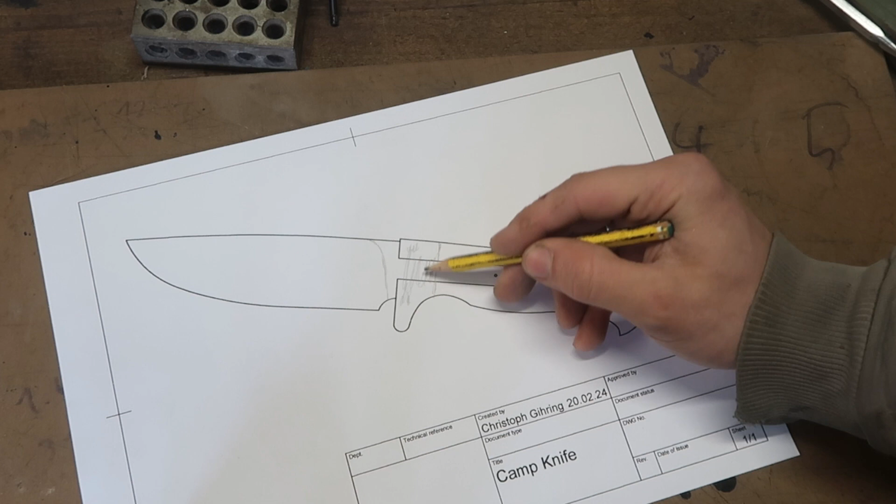Hey guys, we're back in the workshop and today I've got a pretty cool project for you because we are building a hidden tang knife, which I've never built before. Here's the drawing of the knife, you can see the hidden tang, and this portion up here should be brass, and I'll probably use wood for the back end. The blade is made out of 80CRV2, with a nice full flat grind. I'm probably going to do a convex grind on it, which will be a challenge since I've never made a knife like that.

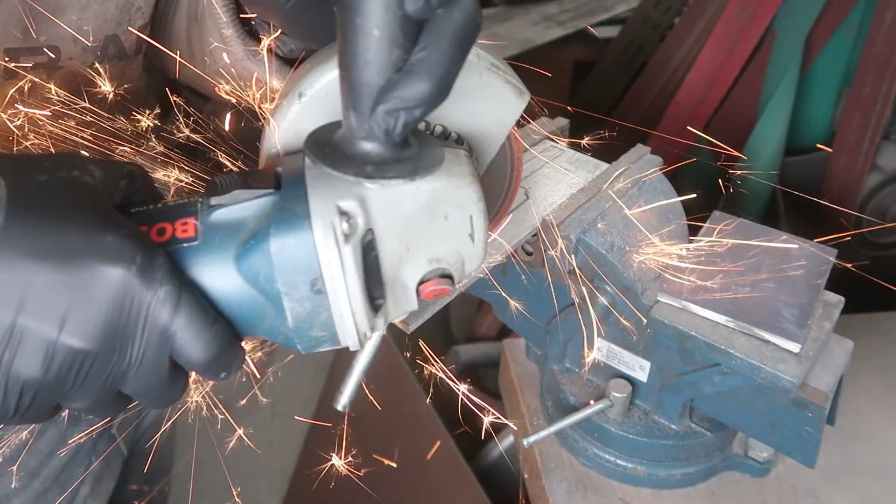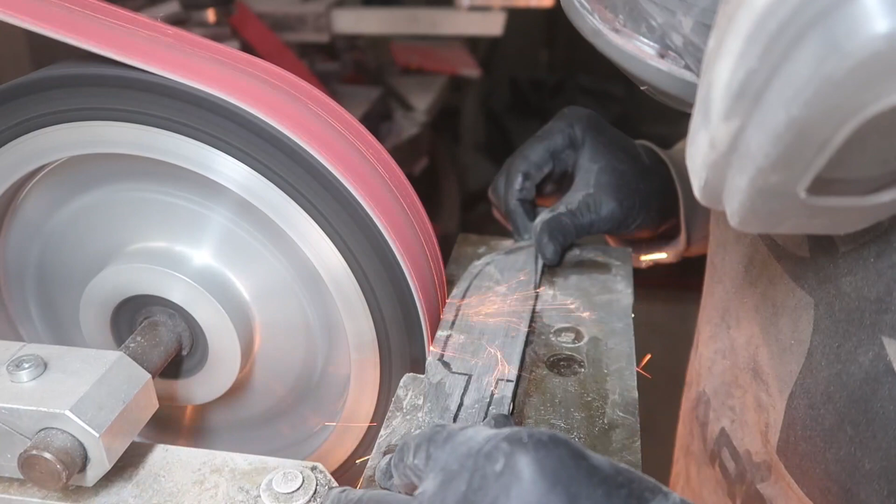Profiling my knives, I'm mostly using my contact wheel that just removes the material as quickly as possible, and you don't get any kind of low spots like you would on a flat platen. It's just super satisfying to watch how the contact wheel removes that material.

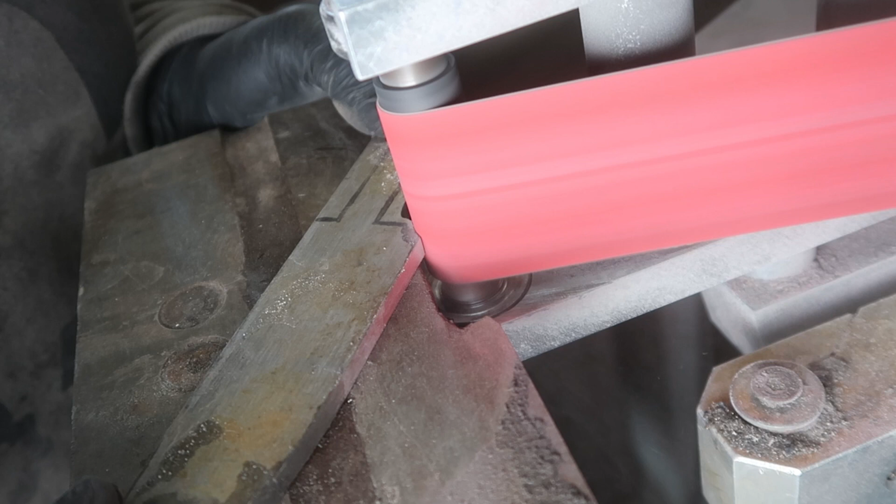So I have now roughly profiled the knife, and as you can see I haven't worked on the tang because I want to do that after heat treatment so everything is nice and square, and because I'm also waiting on a part for grinding that tang, which should come today, then I can grind it tomorrow after heat treatment. But that's the blade shape, and I will now start rough grinding before heat treatment because I also want to add a hamon to this blade.

So here I'm testing out a new Dykem pen, and this pen is more resistant to high heat, which I really do love.

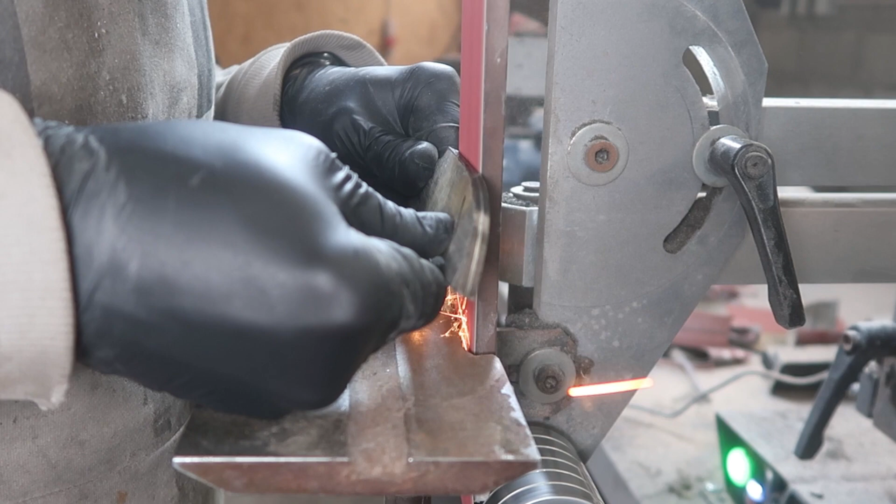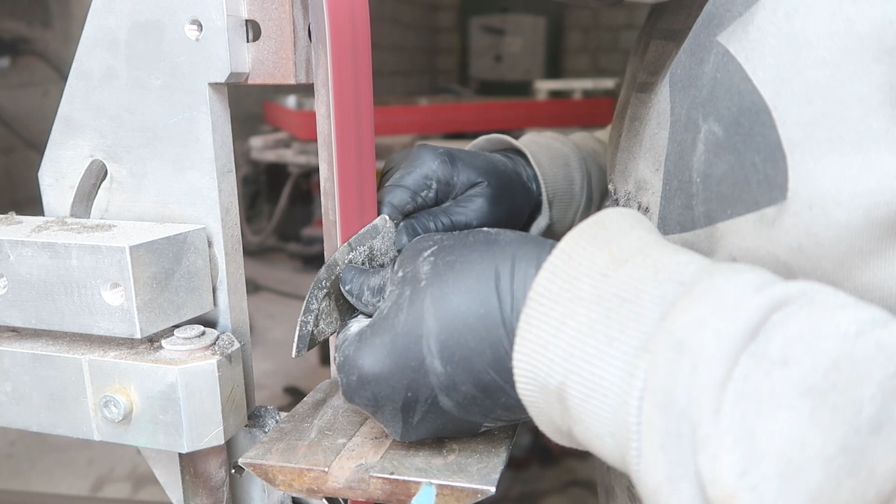Now for the first step on the bevel grinding, I take the knife to a 45 degree angle and remove bulk of the material with an older belt, then I switch to a fresh belt. When you knock out that 45 degrees first, your belt stays much nicer because it doesn't have a sharp corner to remove at the beginning of the grinding.

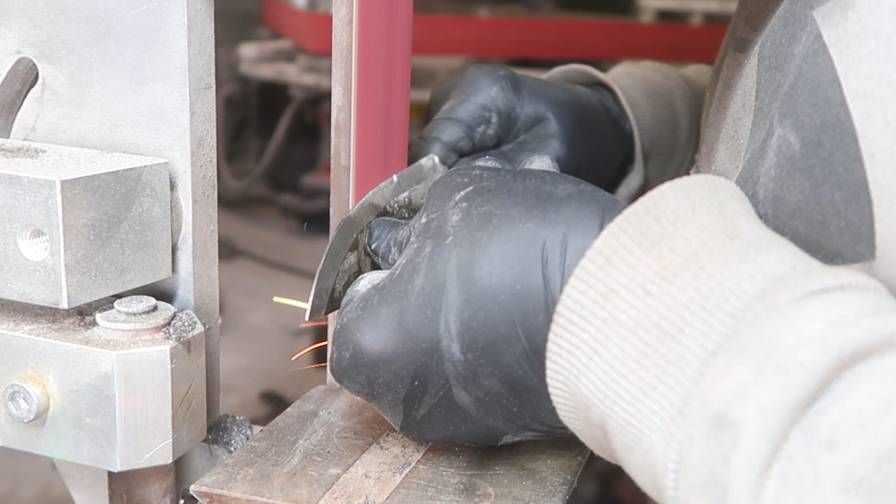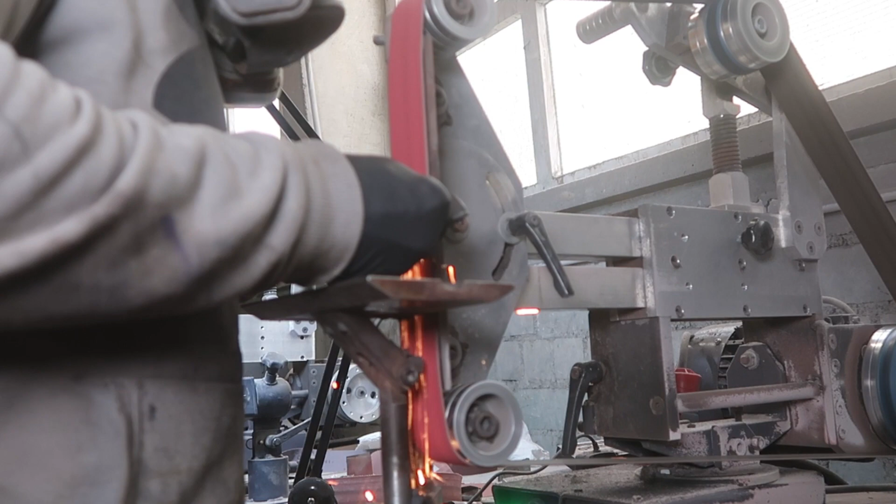The times you see me grinding, I'm wearing those black latex gloves, and I know you shouldn't wear gloves on the machine, but I have so many small metal splinters in my fingers and I'm sick of it. I think I have so many in my skin that I get detected at the airport.

That camera lens is... it's pretty dirty.

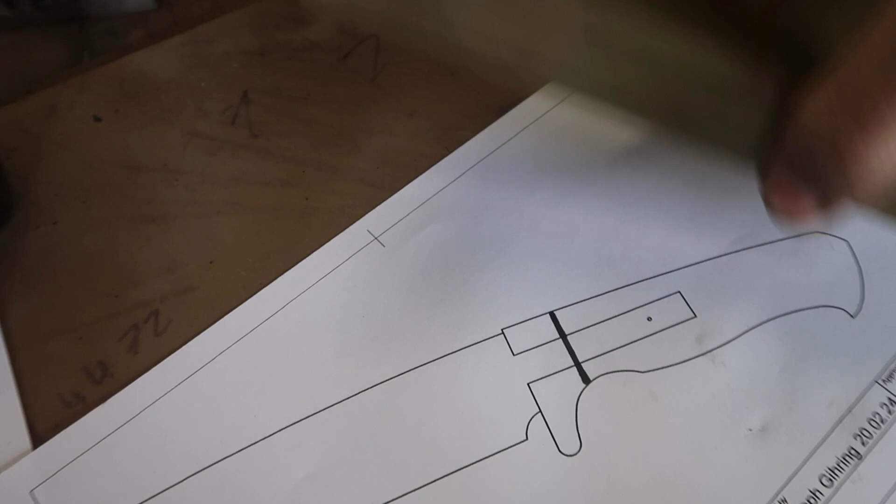Better now. So you can see it here, this should be the brass bolster. And I've got this thick, yes that's thick with three C's - this is like a really thick piece of brass, so I've got to cut out this piece.

And I also want to use that oak, it's called Mooreiche in German I think. Don't know, it's really beautiful black wood, and I just want to prepare everything so I can start working on that tomorrow.

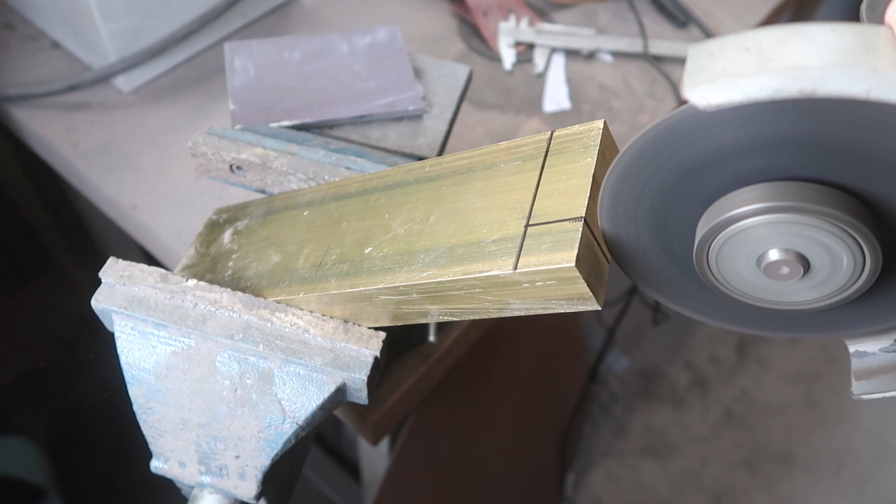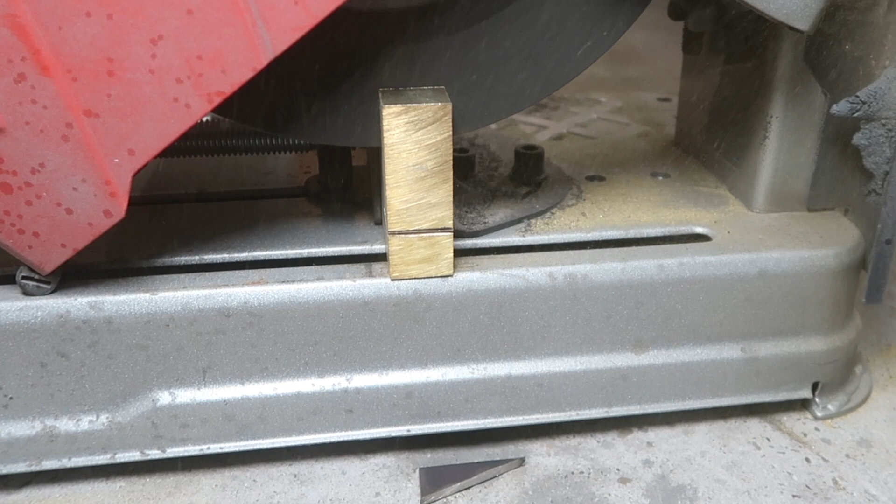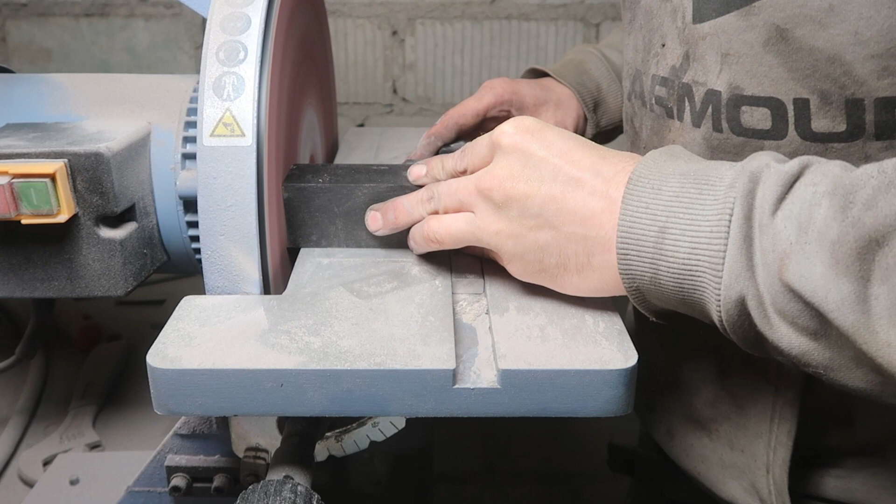Working with a hidden tang is really tricky because you have to get everything nice and square. Everything has to line up - the bolster has to line up with the wood, the tang has to line up with the bolster, and that was a really challenging part to get everything nice and square.

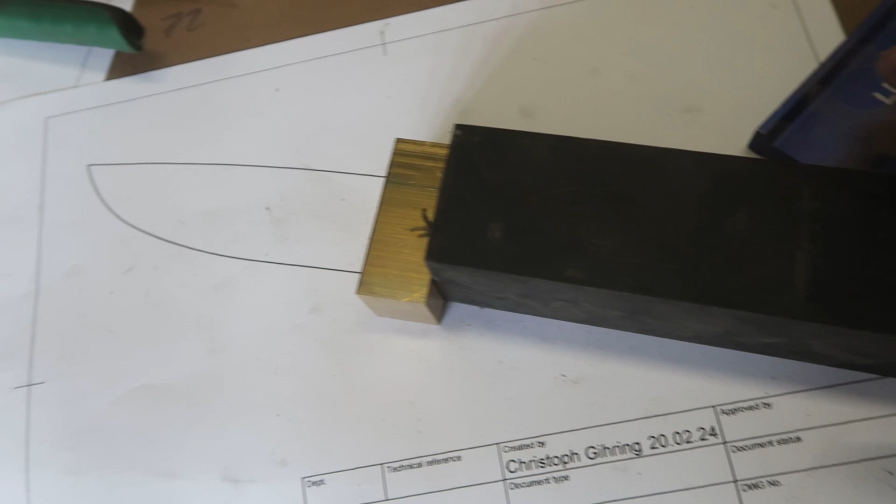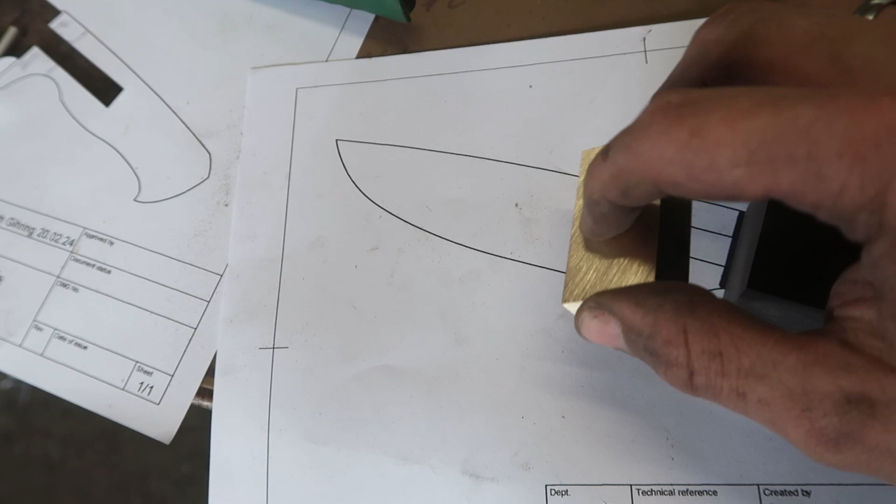So now you can roughly see my setup on how I want to have it here. The guard will be this brass piece, and I've got this black oak right here, just set up roughly like that, and then the blade will come out of here. So that will be challenging to get everything nice and fitted up.

So now that the knife is out of the heat treatment, I can finish up the grind on this knife. While I'm grinding, I'm always checking my grind lines, but because we did a hamon on this knife, I'm also always checking in the light if I can already spot the hamon, and it looks already really cool and amazing.

What is a hamon? A hamon is actually a differential hardening on the blade, so the edge is hard but the spine is soft, and later when you etch it, it will show up as a nice, really cool line in the blade.

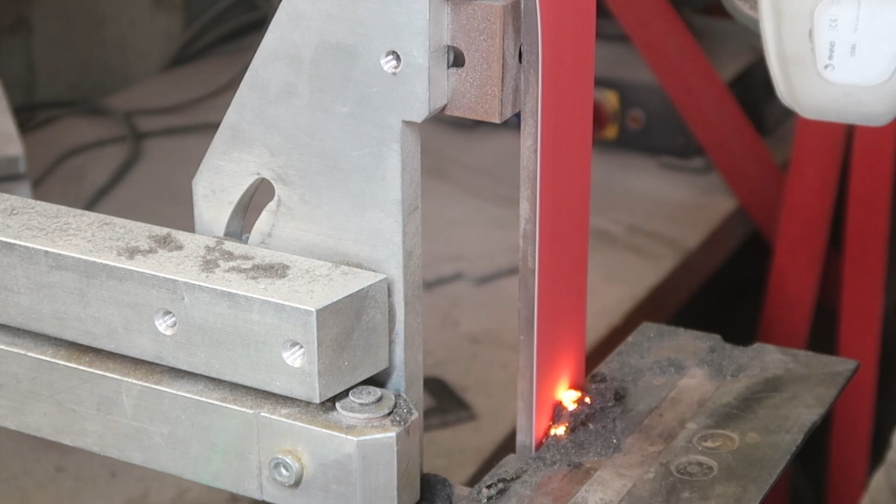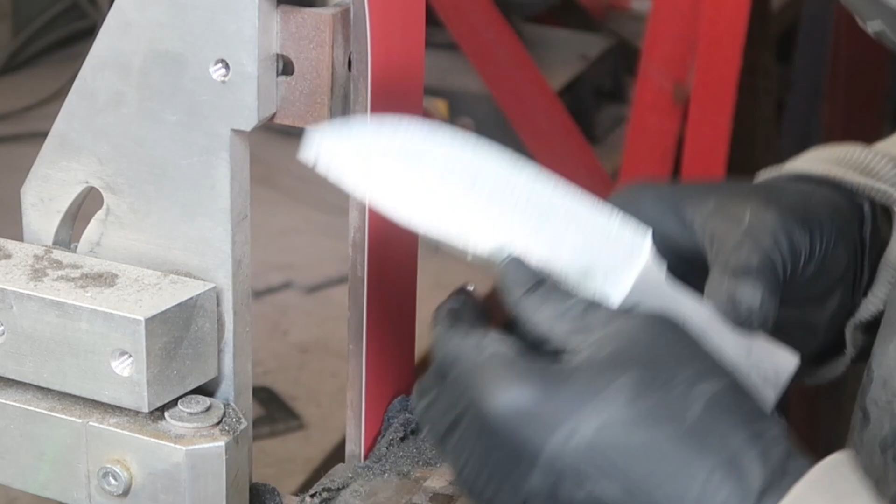So it's now the second day and the package arrived yesterday, luckily from Handlematerials.at. Great guy, love him, and he shipped it out quite quickly. I ordered some material and some other tools that I need for this project.

So what I actually got in here is some material and maybe some small teaser, but that will be for another project. This is a straightening hammer with a carbide end bit, so you can straighten out things, but that's also not for this project. I think it's this one right here.

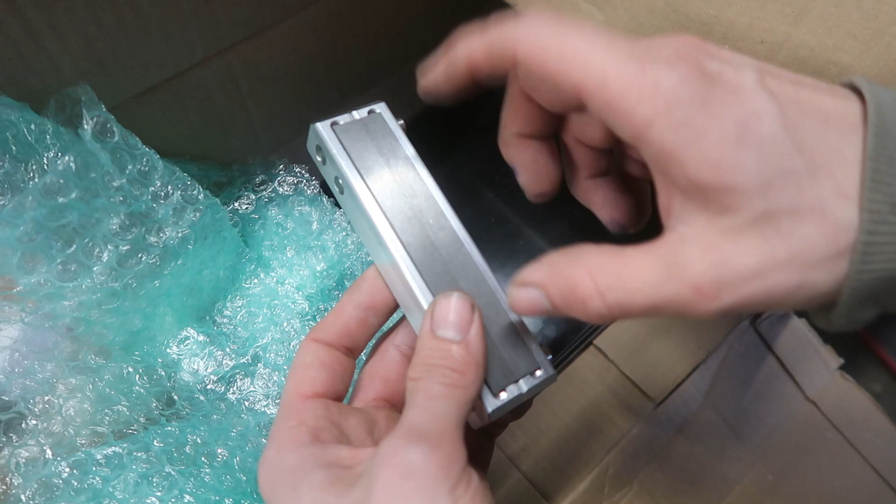So let's just have a look. Yes, that is a file guide with carbide end faces right here, so you can grind really closely to the grinder, and those carbide end pieces are super hard. I think you can just cut them with diamonds, and if you touch them on your belt grinder, nothing really happens and everything stays nice, square and symmetrical. So these are pretty neat.

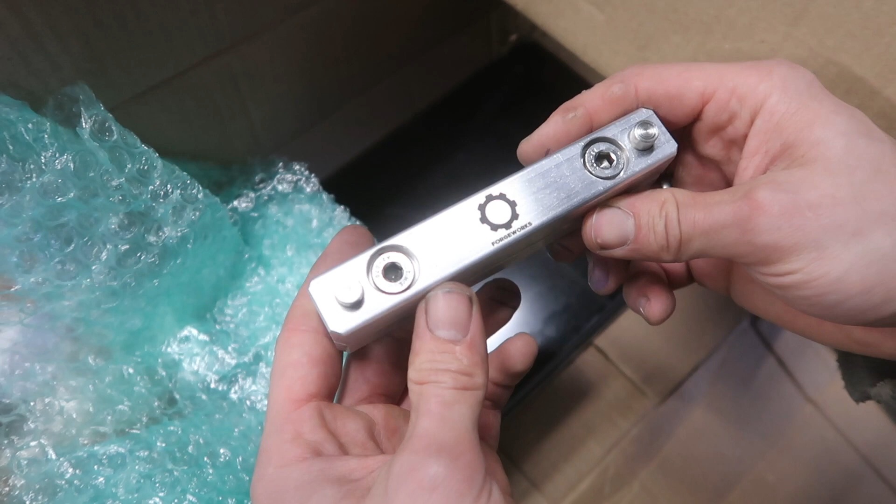And what a Chad, great guy, love him. He also etched my logo on there, which I didn't know, but now I know, and what a great Chad, really love him. So yeah, that's pretty cool.

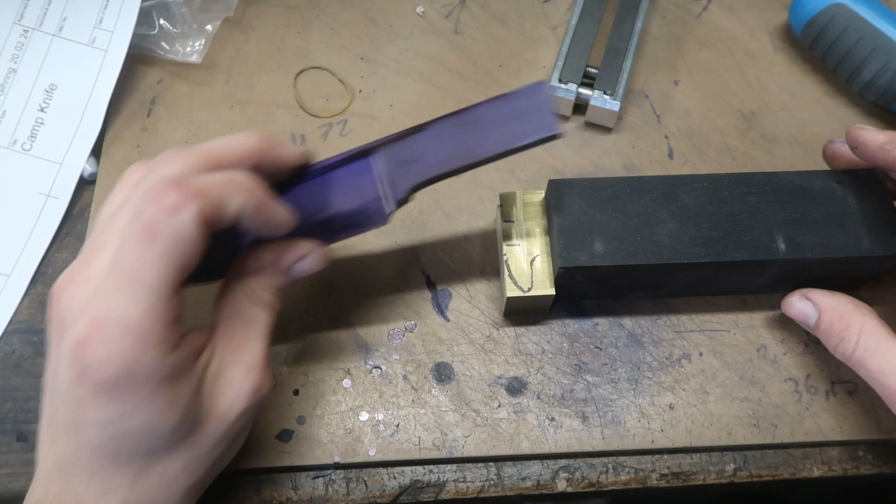So let's stop talking and start working on the knife. All right, so what the next task will be is we have to scribe out some lines for this tang, because as you can see here, the knife needs a tang, and this one is much too thick right now. And I've also prepared these ones yesterday, and this should fit somehow in there like that. So we have to scribe some lines and then also use the file guide to get everything nice and square.

So now I'm ready to grind in those shoulders with the file guide, and the file guide also helps me so I don't grind in too deep, so I have a definite stop on that and I can get everything nice and square. So I've squared it up with the spine and drawn some lines onto it. So let's start grinding.

So now I'm done with grinding in the shoulders of the blade and finishing up the tang of the knife. I've also ground a little bit on this side here, so later on the fit up will be nicer.

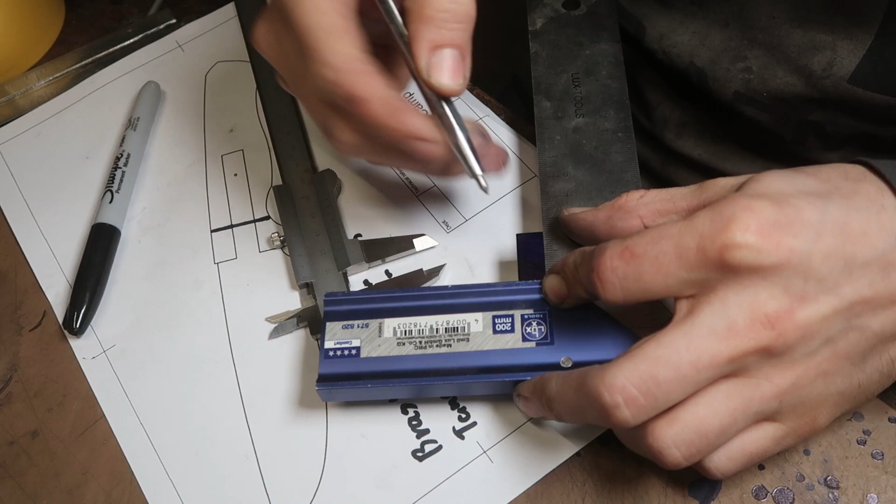Fitting up the guard was also challenging because you have to take a lot of measurements, especially when you haven't done it before. That was really tricky to see which measurements I need, where to put them, how to measure everything, is that correct? So there were a lot of things in my head at the moment, like what should I measure, what should I do? It was a lot of thinking, and I hope this gets better in the next project.

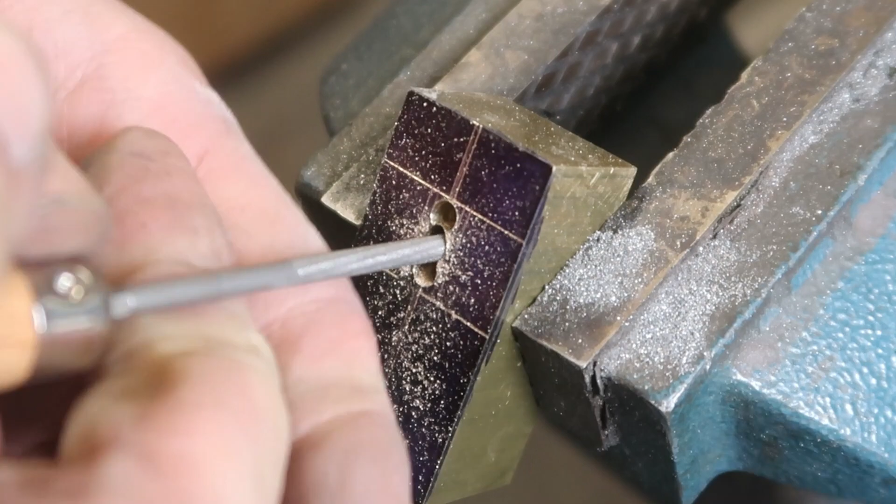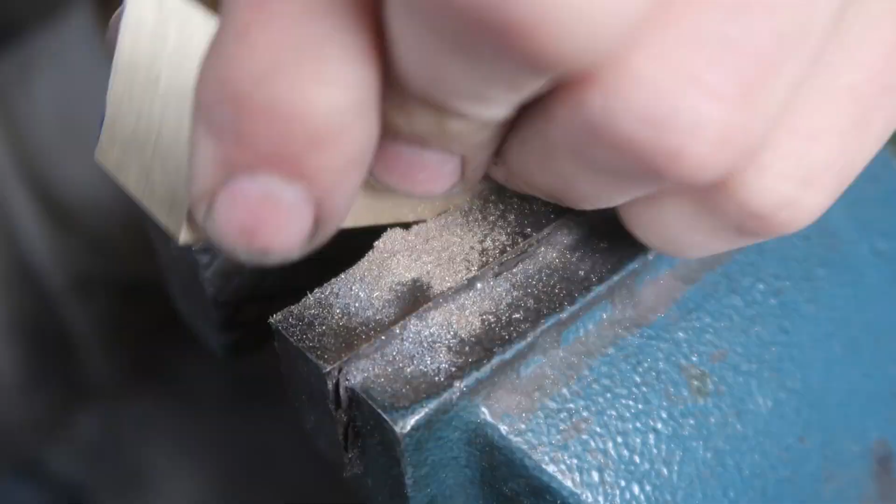It just seems like a couple of minutes in the video, or not even that, but sometimes it's like you're spending hours. Filing up that guard took me way too long, and it always looks so fast. Whenever I look at videos on how they do it, it looks so fast, but then you're working on it yourself and you realize, well, that's a lot of work, especially if you've never done it before. That's why I'm doing this project, because I want to learn new things and get better at it, get faster at it, and get more professional at it.

So as you might see, it is a little bit darker now, and it's another day because I had a lot of trouble with that guard. Yesterday I was really frustrated. It wasn't fitting because I had a bump in that guard, and then it came over it, and then it was super loose, and I was like, nah, I'm done for today.

So I set it aside, and I spoke with some friends, Baltic Knives, really great guy. We had a talk about it, and also Martin Huber Knives, and they gave me some tips to fix it. As you can see, the guard is now on. There are still some minor gaps, but instead of just focusing on these gaps and spending hours now on this guard, it fits. I will also drill in a pin to secure it, and did some more work on the guard, and now it fits, as you can see.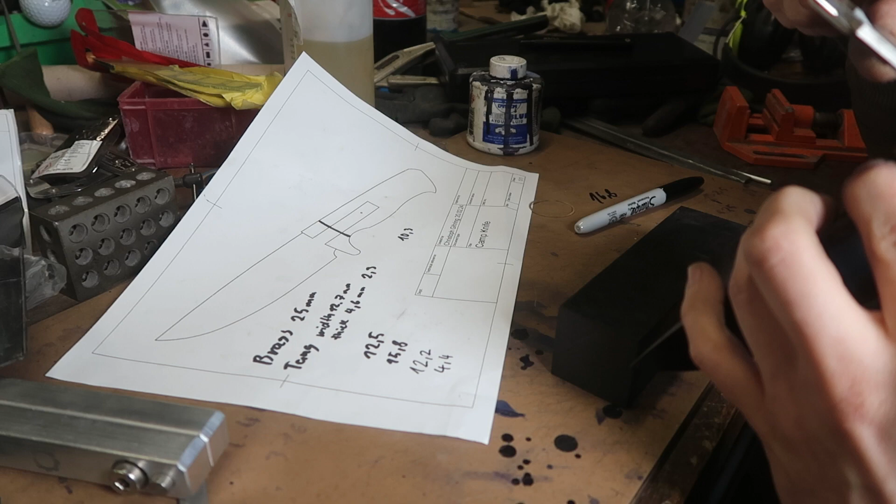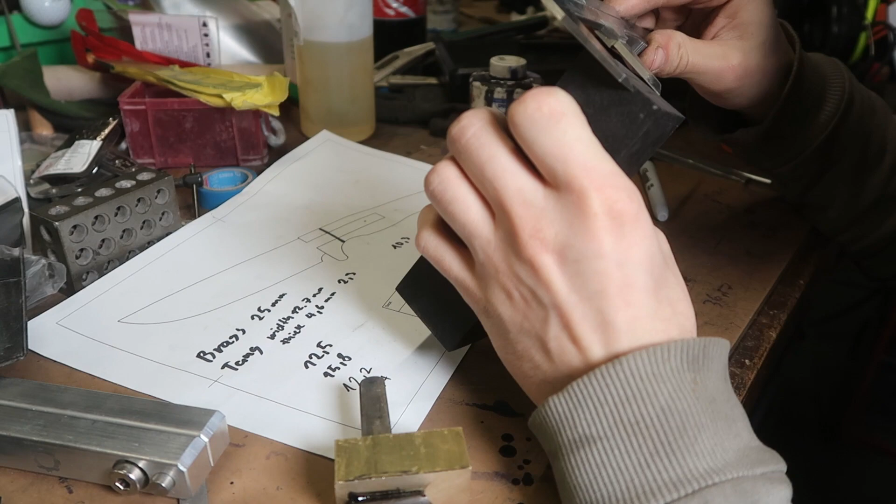So this knife really took on my sanity. I was so often close to just dumping that project and saying, alright, I have to record another video, make something different, but I moved out of my comfort zone, and now I'm pretty happy that I made that knife. I've learned so many new cool things that I can apply to the new knives I'm working on at the moment.

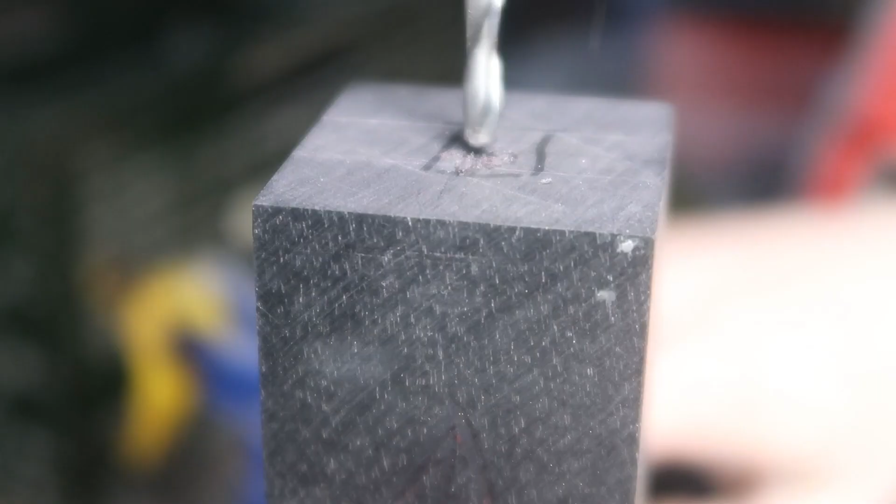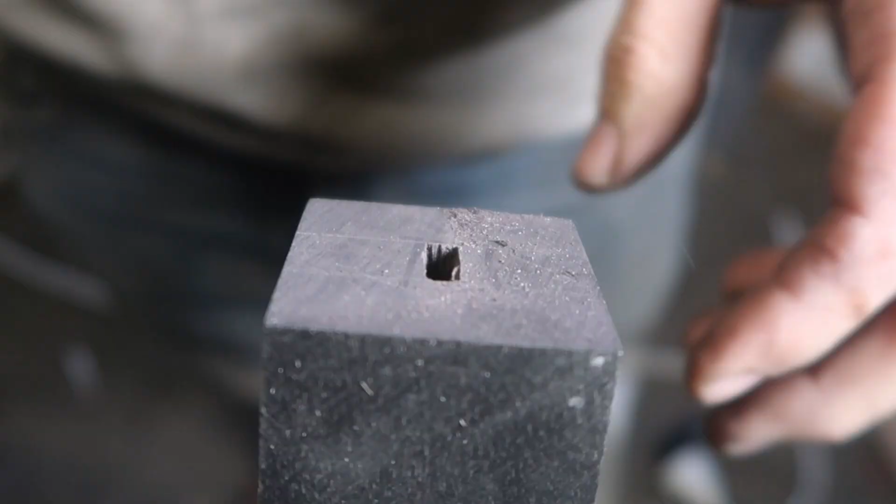So after drilling out the holes, I can now use the broach, which is actually just a small saw, to enlarge that hole, and after that I'm burning in the tang for a perfect fit onto the tang.

So the wood is now pretty much done, and I just have to drill a pinhole, so I also secure the wood with a pin.

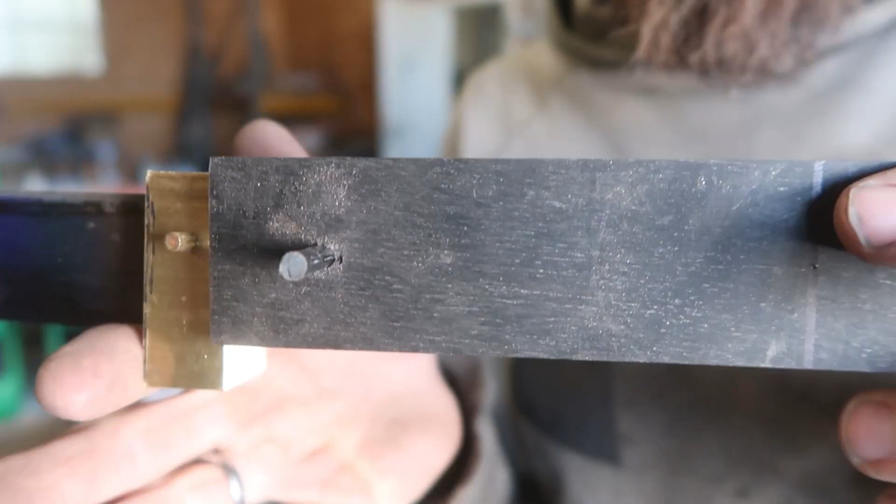So the knife is now finally constructed, roughly. I just have to glue it up. But before I glue up the knife, I have to hand sand the blade and etch the hamon. I also have to finish the face of the bolster, because I won't be able to hand sand this piece after everything is glued up. The rest I'll do afterwards on the grinder. Not sure if it's a good idea, but we'll test it out - that's the spirit of this episode, just testing stuff out and seeing if it works or not.

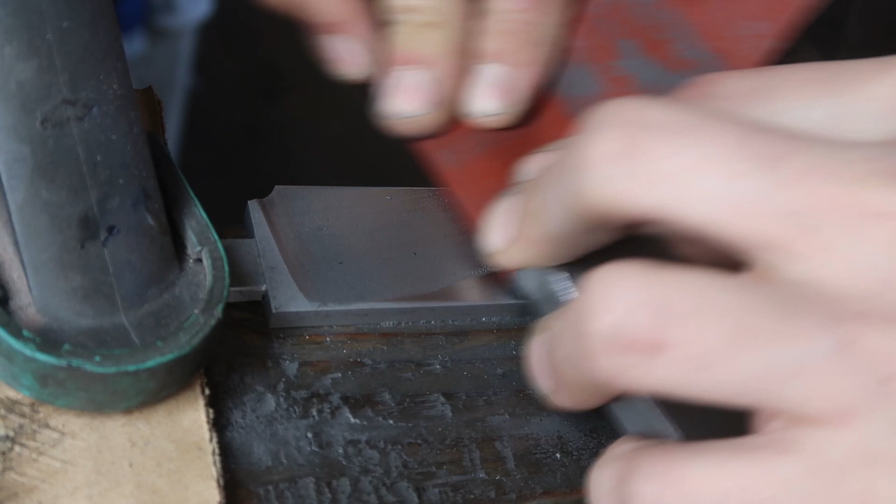So now I'm ready for the glue up. I've also taped up the knife and quickly etched it behind the camera to get out the hamon, but you'll see it afterward. I may have already made a mistake by drilling the second hole before glue up, because when the pin is in, I can't really squeeze it with a clamp. That was a smart move by me, but I learned from that. I was throwing that knife into the etch and I was just like, I should have done that after everything, but now the hole is in.

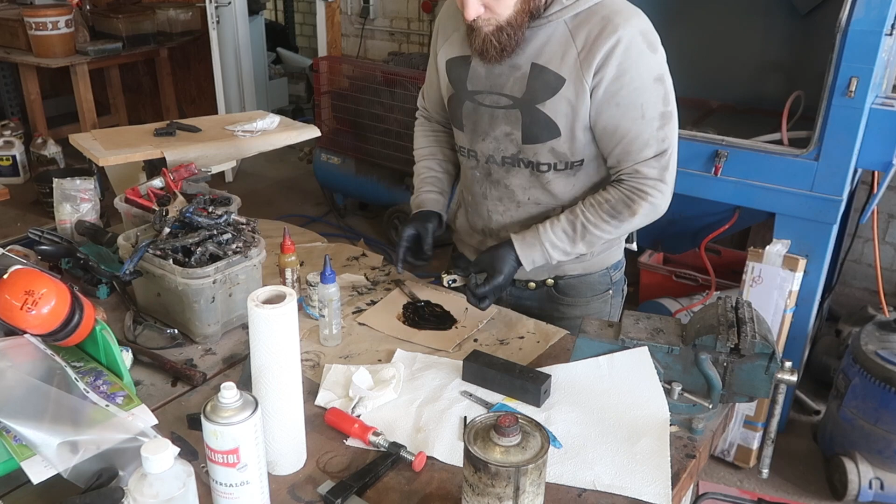I don't want to throw away the wood and redo everything. I just want to get that knife done. I've already learned so many things with this project, and even after that I think I'm still getting a great knife that I can use personally. If I ever make something like that again, I have to learn more, but I can already apply what I've learned now to my next hidden tang, and hopefully that will go better than this one.

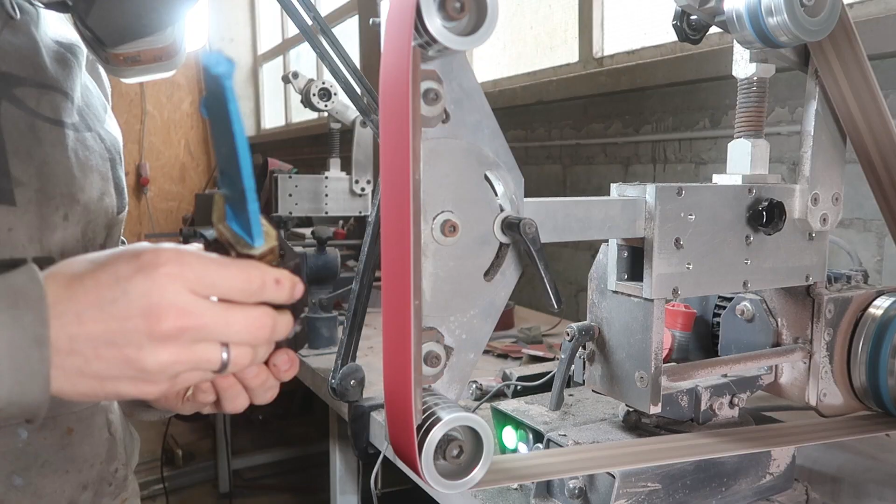So it's the next day and the glue is dry, and now it's time to shape that handle. First, I have to square up that handle block to the bolster, and after that I can start working on the final shape of this knife.

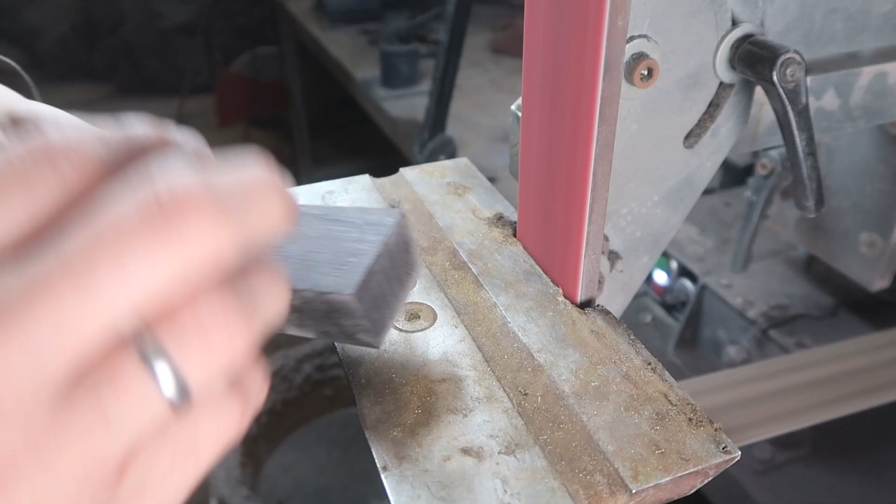When I was working on that knife with that thick brass piece, I had to be really careful not to overheat that guard, because brass likes to suck up heat and takes that heat in. I had to set it aside sometimes because I didn't want to dunk it into water due to the wood and the carbon steel. So I had to work really slowly with fresh belts and slow, cool grinding.

So now I've finished the knife, and I'm kind of happy and kind of not really happy, because the handle didn't turn out as I wanted due to the alignment of everything. I wanted the handle to come out a little more on the back end, so it kind of swoops down, which I'm not really a fan of, but we have that big belly, so it still lays nice in your hand.

But it's weird to have that knife in your hand compared to a full tang knife, because the weight balance is so different - it's quite top heavy because the wood has barely any weight, and you've got that bigger blade and then that bolster, so everything is kind of top heavy, which is kind of cool if you want to do a lot of chopping.